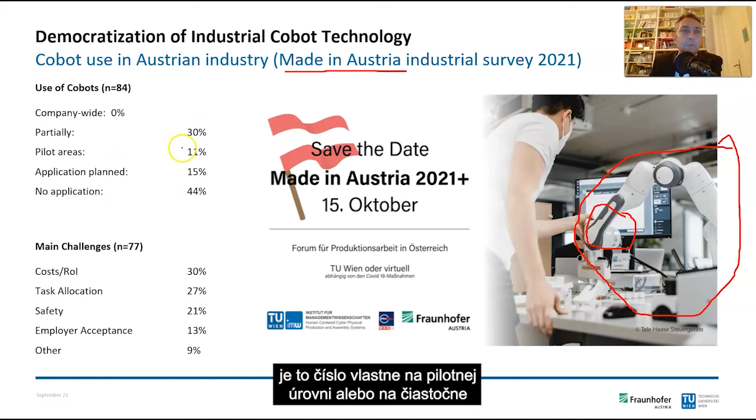We ask that question about the use of cobots every year within our Made in Austria industrial panel with about 100 companies, and actually the cobot use cases are at the pilot level, only partially existent in companies, or the application is planned. If you ask for the main challenges in cobot use, you see that cost or return on investment is still a major factor, as is the task allocation between humans and robots, and of course safety and employee acceptance in terms of using automation devices.

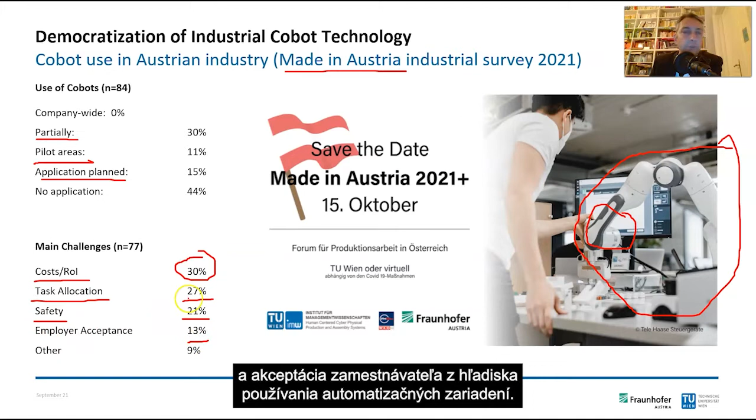So that's where we start with the idea of democratization of industrial cobot technology, because we encounter today this large gap between high-arching expectations on the one hand and actual sales numbers and use cases that are still well below the expectations. I always compare cobot technology to a tool like a screwdriver, for example, that everybody is able to use, everybody uses, and everybody at the industrial shop floor has a screwdriver and can use it. So there we come to democratization of industrial cobot technology.

With the term democratization, we think about non-discriminating access to the design, the development and the use of technology. So it's about access. The second issue is that this notion is important, as cobots are designed for very close interaction with people. And if you look towards industry, the underlying paradigms today set very high access barriers in terms of prior knowledge and experience, and that limits and restricts the potential for use cases. So cobots actually are an expert tool on the shop floor, and in our view that's hindering the spread of this technology.

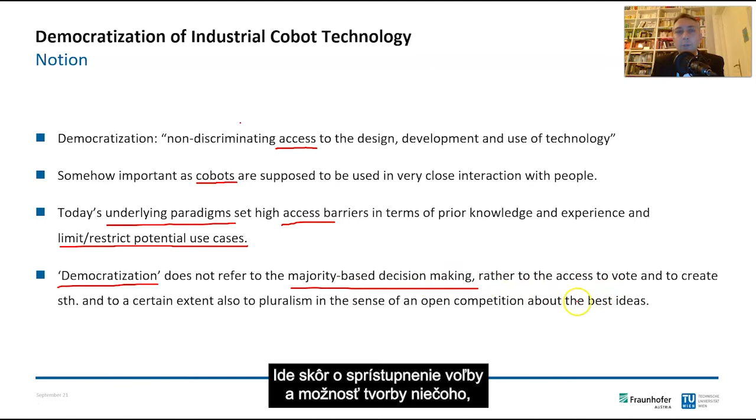Democratization usually means another thing, and within our scope it does not refer to majority-based decision-making, rather to the access to vote and to create something, and to a certain extent also to pluralism in the sense of an open competition about the best ideas. That's important if you look at the term democratization from an industrial side.

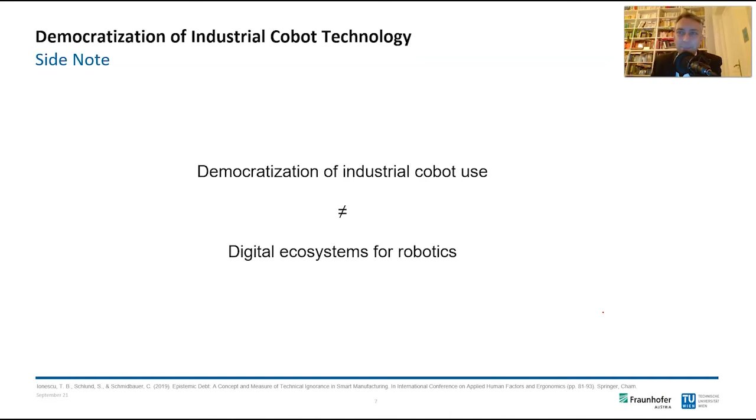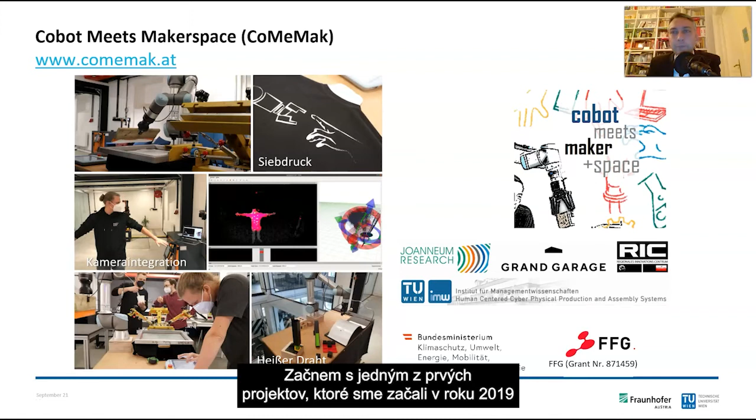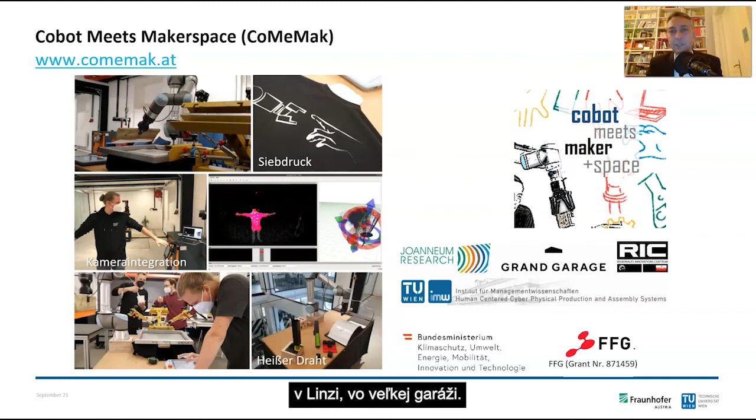So I'd show you some research projects and examples of what we do in terms of democratization of cobot technologies, and I'd start with one of the first projects we started in 2019. It's called CoMeMak, Cobot Meets Makerspace, where we placed cobots in a makerspace in Linz, Upper Austria, in the Grand Garage. It's a project with great partners from Austria, and we made this cobot technology accessible to the maker community, to interested laypersons, and asked them to create, implement, and share their own cobot applications, so that we might find applications that are interesting for industry, and so that we could create a maker community for cobot applications. On the other hand, we try to make this technology accessible to the makers in terms of safety.

So we create safety concepts for makerspaces, and in terms of the programming, that's why a colleague of mine, Tudor, created his own web-based robot programming environment, called Assembly. You can access it via GitHub or via the net, assembly.comemak.at, and here you see this robot programming environment that became very important over the last 2 years in terms of the pandemic, Corona, so that the makers could play around with their applications beforehand, before they went to the makerspace. Actually, the good thing about Assembly is that you might deploy the code directly, at least to Polyscope, so to a UR environment.

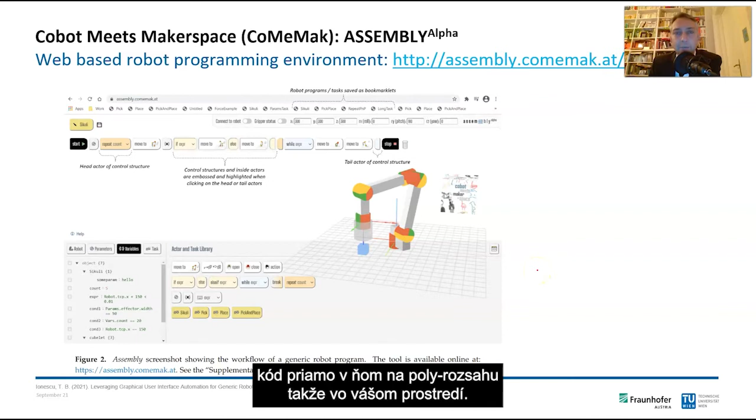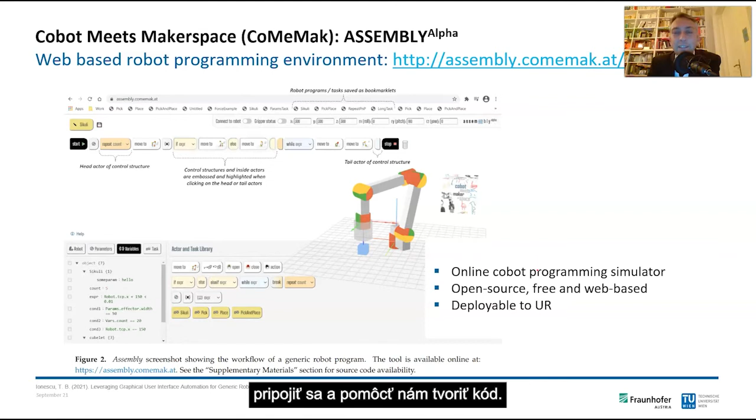Okay, it's an online cobot programming simulator. It's completely open source. It's free and web-based. And of course, we ask everyone who's interested in that kind of endeavor to join and to help us to create the code.

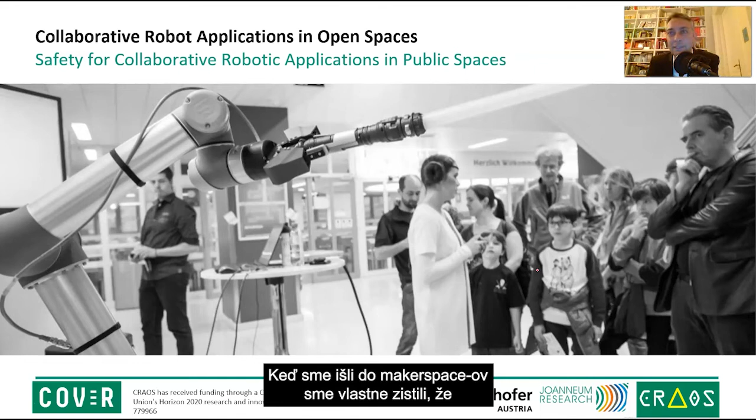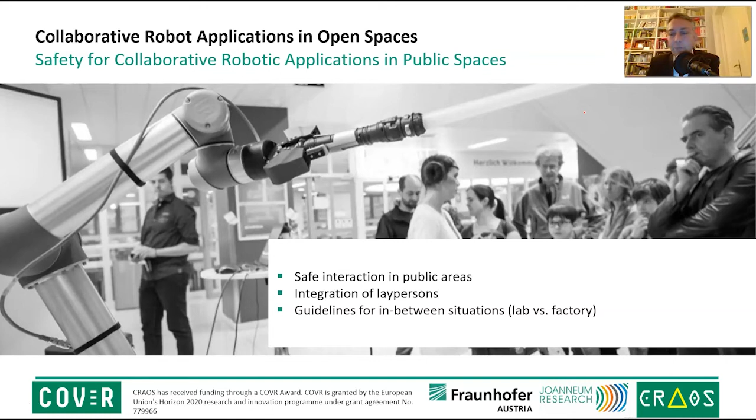When we went to the makerspaces, we discovered that the world of in-between situations, so between lab and factory, is pretty crucial in terms of safety. And therefore we started another project. It's called COVR, about safety for collaborative robotic applications in public spaces like trade fairs, for example, or makerspaces. And there we create guidelines for these in-between situations. It's an ongoing project with the colleagues from Klagenfurt from Joanneum Research.

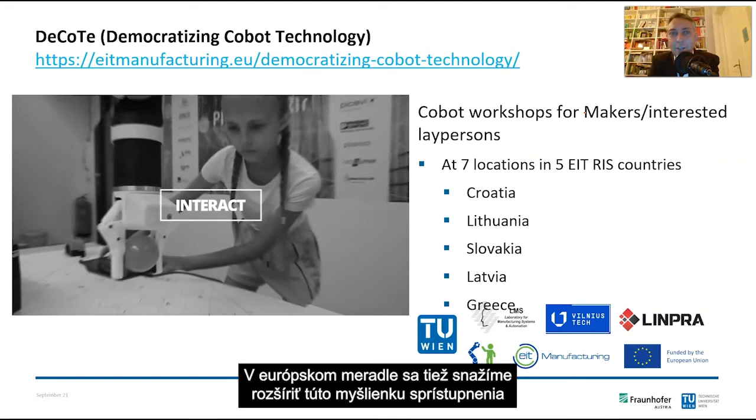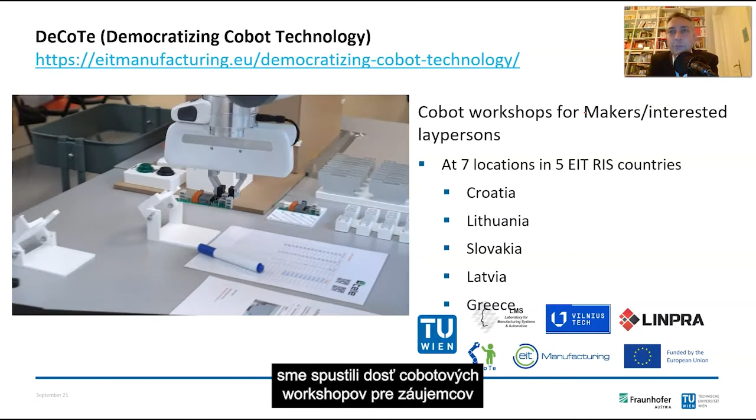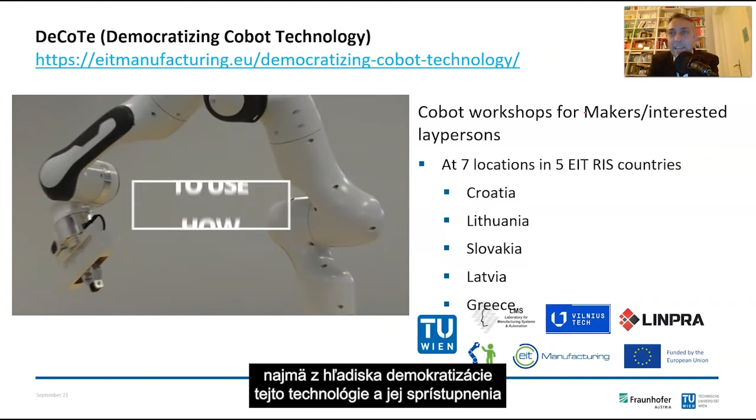On a European scale, we try to deploy this idea of giving a maker community access to cobots as well. And this year we're running quite a few cobot workshops for interested laypersons in eastern, northeastern, southeastern countries, in Greece, Latvia, Slovakia, Lithuania, and Croatia, to enlarge the community of people interested in cobot technology. Once again, in terms of democratizing that technology and making it accessible to many more people than today.

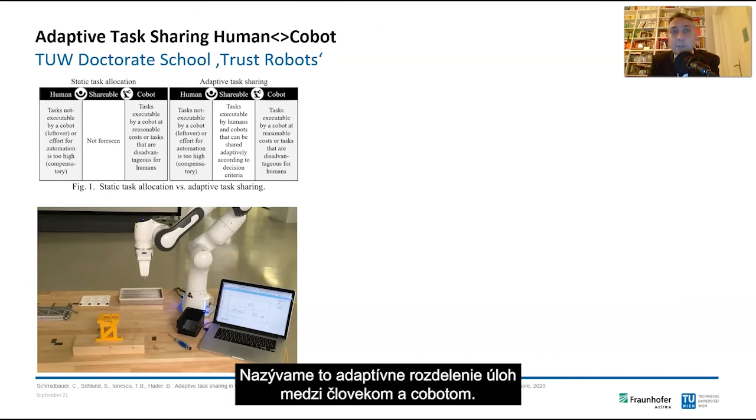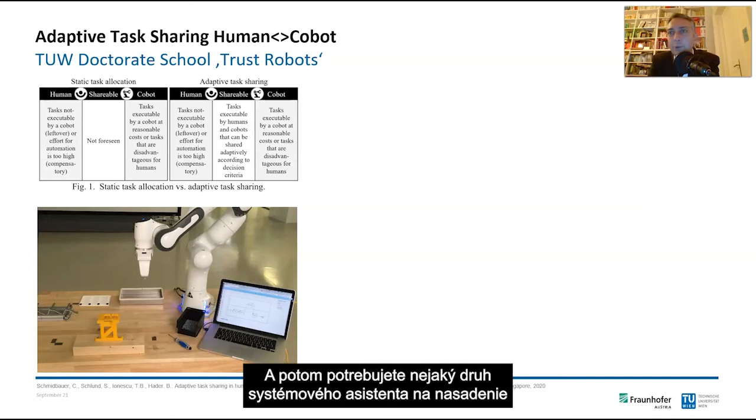And that's especially important if you think about the allocation of tasks between the cobot and the humans. Here we want to move towards a very flexible task allocation. We call it adaptive task sharing between human and cobot, and therefore you need very fast teach-in processes, because you have to engineer everything twice, once for a human, once for a robot. And then you need some kind of worker assistance system to deploy changes in the task allocation very, very fast. And that's what we do and what we design as well.

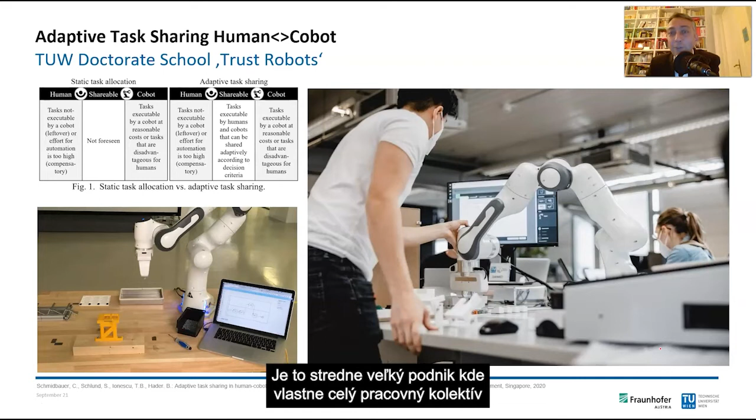And on the right-hand side, you see a field study at a Viennese electric manufacturer. It's a medium-sized enterprise where the entire workforce tried out our new worker assistance system, and they rated it very well with an excellent usability score.

Talking about democratization of technology, I think nowadays we always have to talk about security as well. You are probably very aware of the safety issues with that kind of robot. Here in Europe you usually need a certification of a safe application, which is labor and effort intensive and today very costly. And in the future, we expect that the safety, so the personal safety, the risk to injure somebody, will actually be replaced by the security risks. Actually, already today, the security challenges might account for the safety risks.